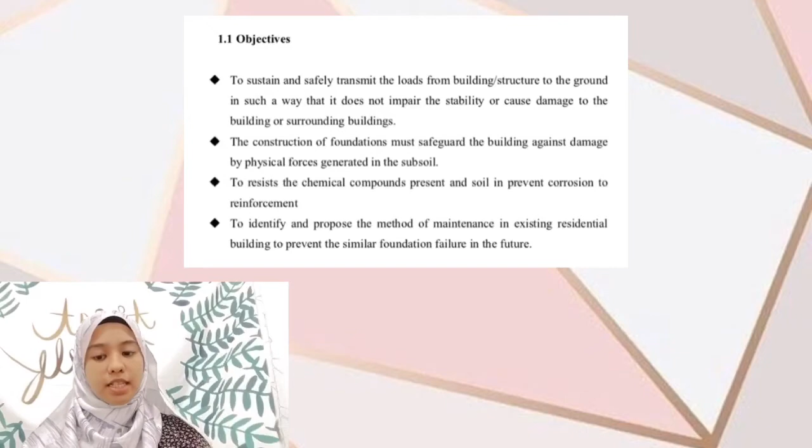88 unit houses Taman Tunas Muda on lot 6034 Mukim 12, daerah Barat Daya, Penang is an observation site for conducting basic failure case studies. From the study, the type of failure, cause, and defect will be determined through the analysis and evaluation. The scope of the study consists of the proposed method of maintenance of the appropriate foundation in the residential building to prevent the similar failure.

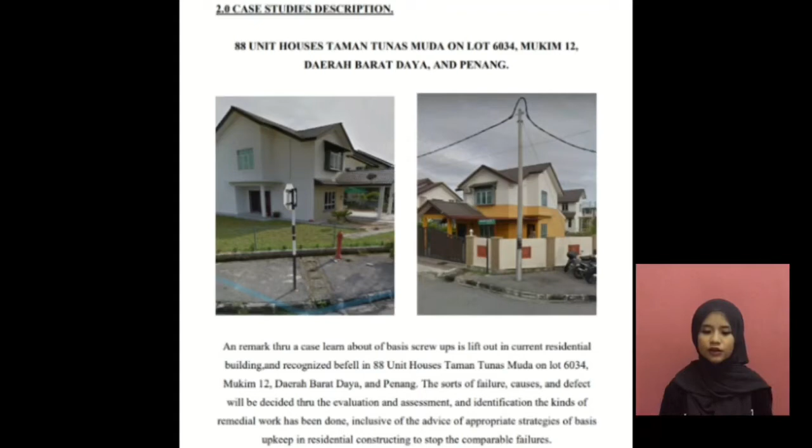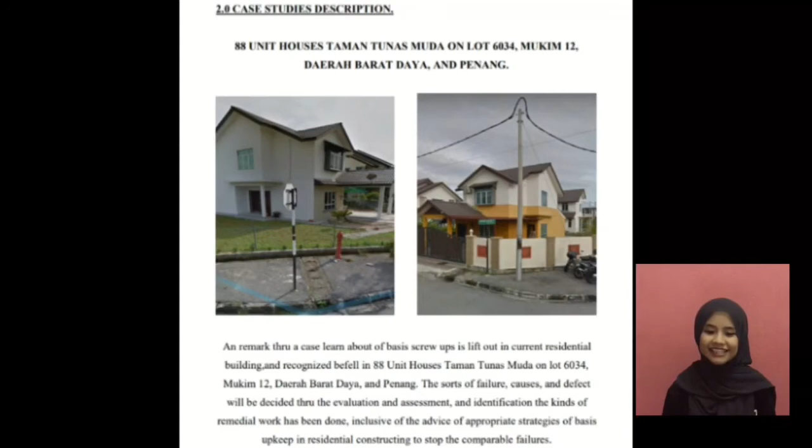Our group chose the location of 88 unit houses Taman Tunas Muda on lot 6034 Mukim 12, daerah Barat Daya, Penang. The sort of failure, cause, and defect will be decided through evaluation, assessment and identification. The kind of remedial work has been done, inclusive of advice of appropriate strategies of foundation upkeep of the residential building to stop comparable failures.

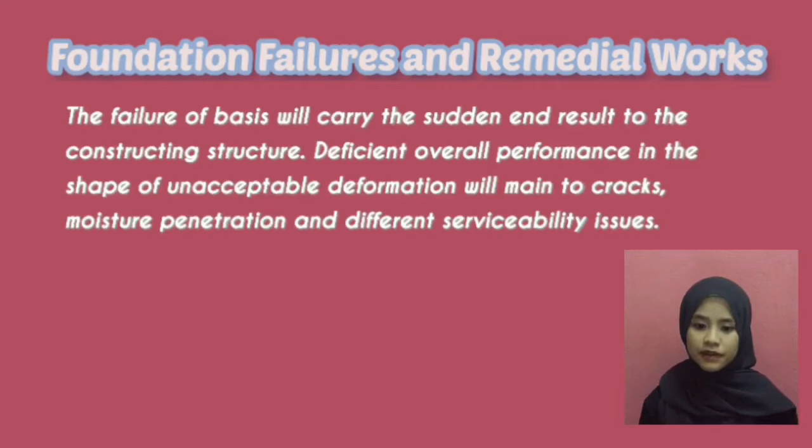Foundation failures and remedial works. The failure of a foundation will carry sudden results to the building structure. Deficient performance in the shape of unacceptable deformation will lead to cracks, moisture penetration, and different serviceability issues. The type of foundation failures.

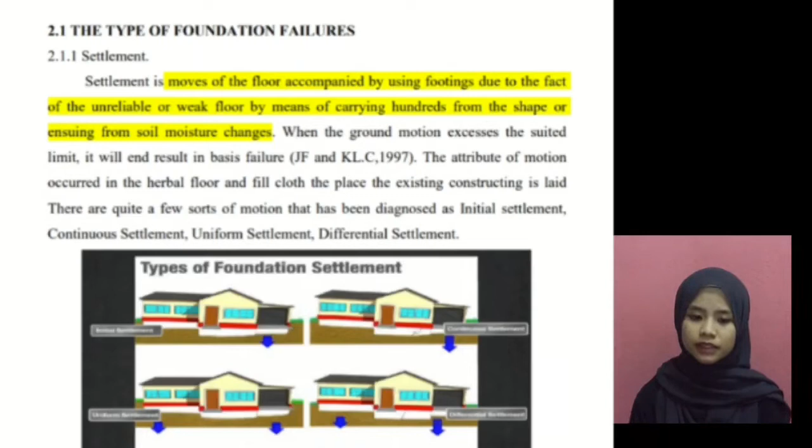Settlement. Settlement is movement of the floor accompanied by footings due to unreliable or weak ground carrying loads from the structure or resulting from soil moisture changes. So these are the types of foundation failures: initial settlement, continuous settlement, uniform settlement, differential settlement.

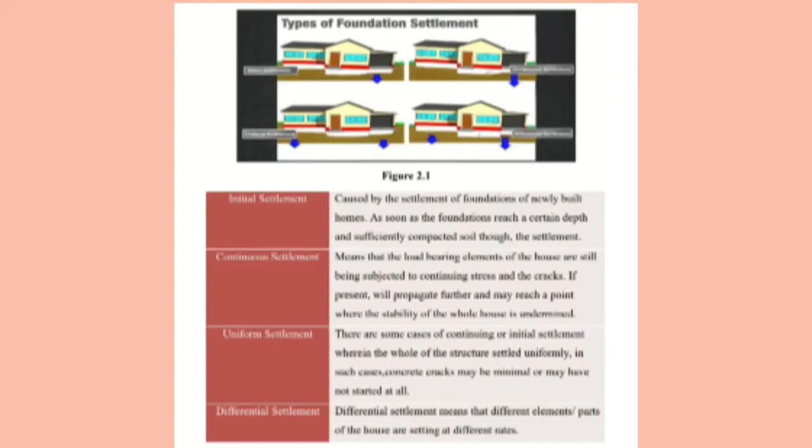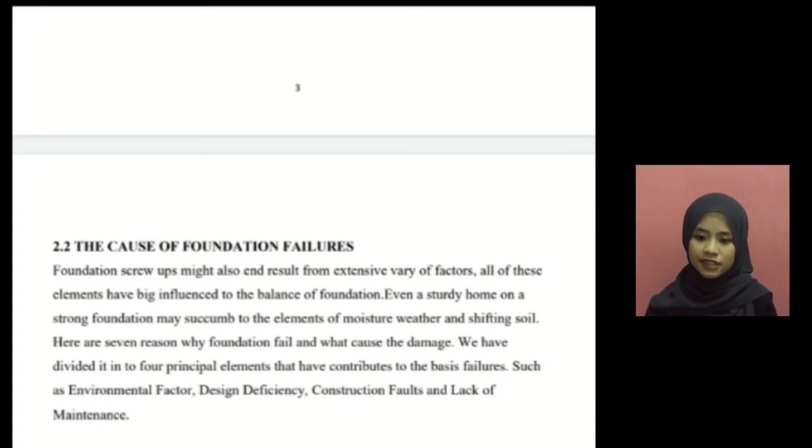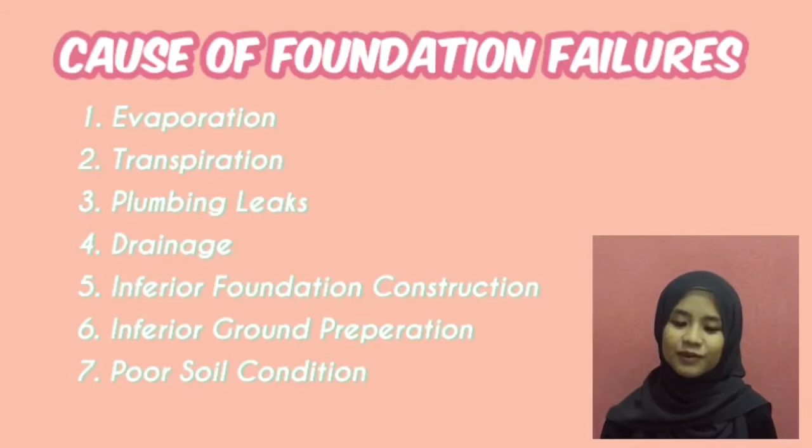So this is the cause of foundation failure. There are 7 reasons why foundations fail and cause damage. There are 4 principal elements: environmental factors, design deficiency, construction fault, and lack of maintenance. But these are the 7 causes: evaporation, transpiration, plumbing leaks, drainage, inferior foundation construction, inferior ground preparation, poor soil condition.

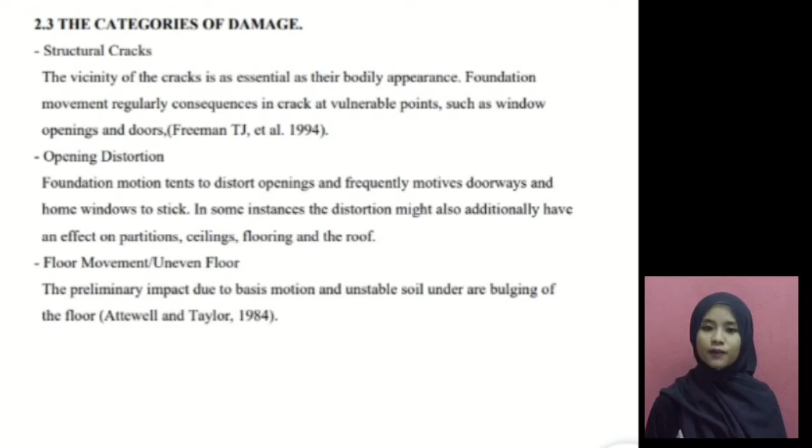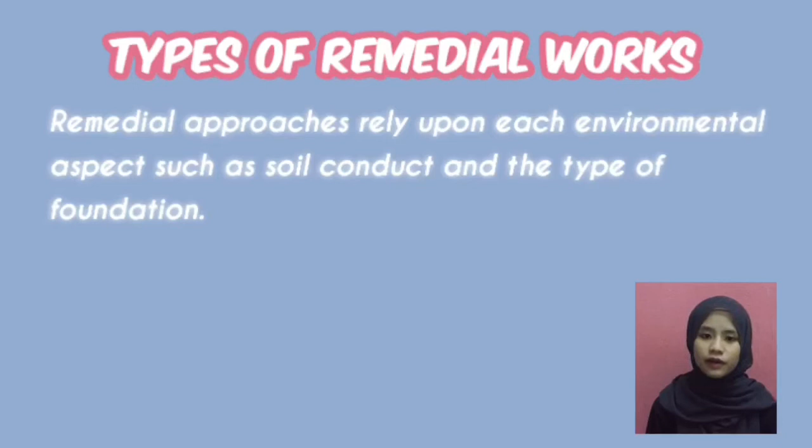The categories of damage. There are 3: structural cracks, opening distortion, floor movement or uneven floor. Types of remedial works. Remedial approaches rely upon environmental aspects such as soil conduct and the types of foundation. So there are 4 types of remedial works: site investigation, testing and monitoring, shoring, and underpinning.

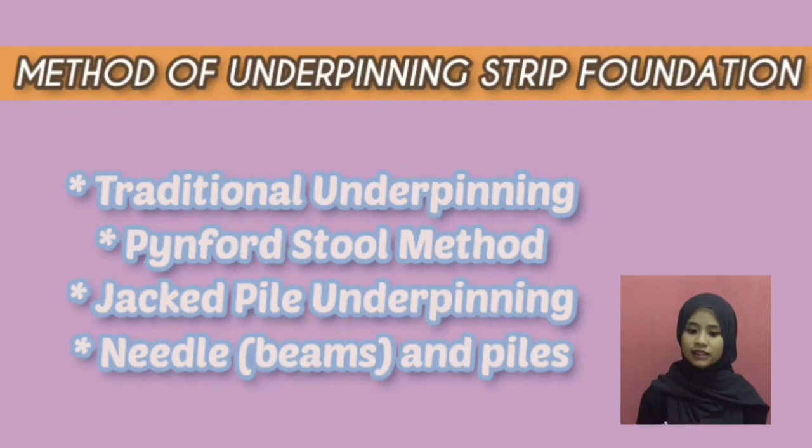Method of underpinning strip foundation. There are 4: traditional underpinning, Pynford stool method, jacked pile underpinning, and needle and piles. So this is the method of underpinning pad foundations or column base. First, temporary support to column and needle piles.

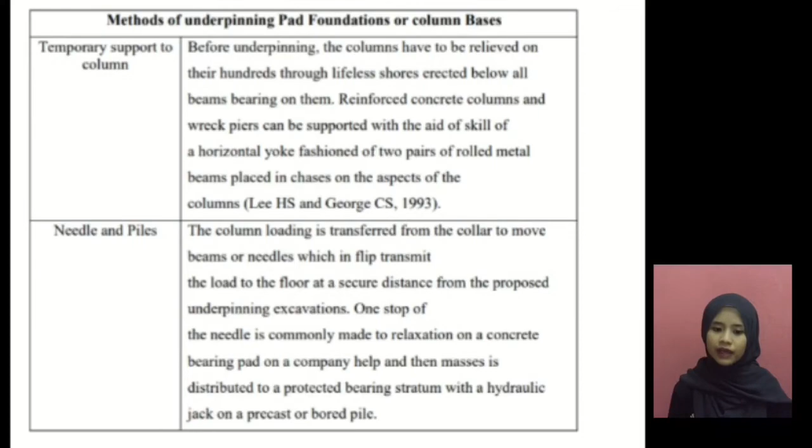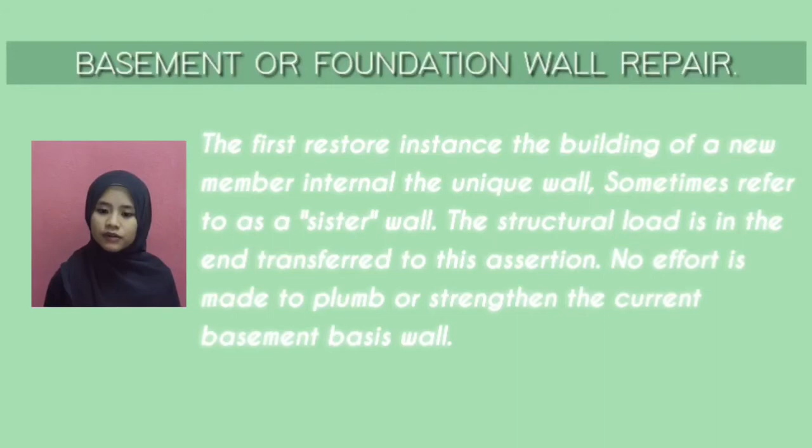Basement or foundation wall repair. The first repair instance includes the building of a new member inside the wall, sometimes referred to as a sister wall. The structural load is then transferred to this section. No effort is made to plumb or strengthen the current basement foundation wall.

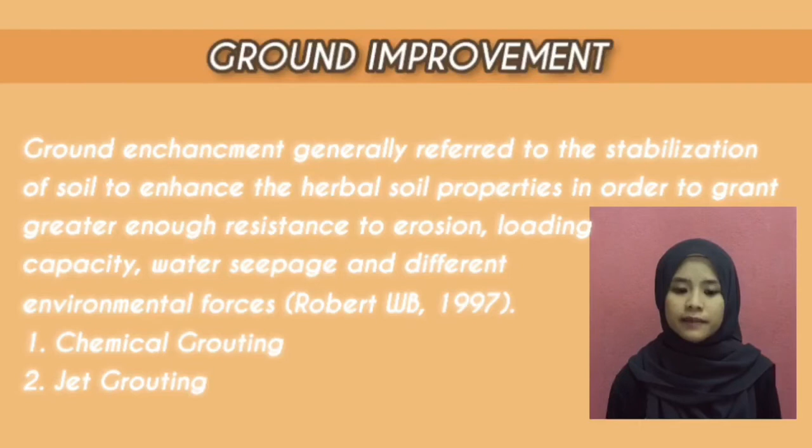Ground improvement. Ground improvement generally refers to the stabilization of soil to enhance the soil properties in order to grant enough resistance to erosion, loading capacity, water seepage, and different environmental forces. There are 2: chemical grouting and jet grouting. Okay.

Summary of analysis and design method.

Groundwater level will increase during the rainy season, and usually it will expand if felt in high moisture content. Groundwater level will also decrease during the dry season, and this decrease is very useful for monitoring and recording groundwater levels. As such, soil is very prone to shrinking in dry conditions.

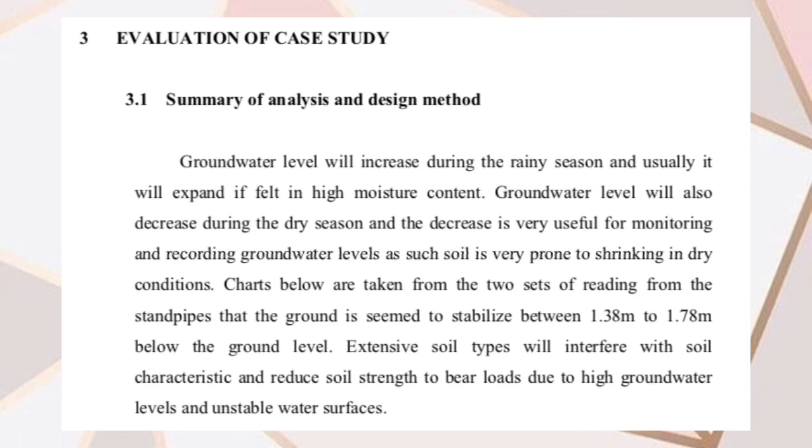Charts below are taken from 2 sets of readings from the standpipes, showing the ground seemed to stabilize between 1.38 meter to 1.78 meter below ground level. Extensive soil types will interfere with soil characteristics and reduce soil strength to bear loads due to high groundwater levels and unstable water surface. Comparisons between case study results analysis.

Article 1. Area House number 40 and 42, Lintang Bayan, using Demec gauge and plastic telltale for measurement. Consultant Ihsan Sendirian Berhad observed and studied the actual problem to find the result based on study and assumption, dividing the remedial work into 3 parts and carrying out site monitoring during the remedial work.

Scope of remedial work: underpinning works and pressure grouting works. Obtained from this boring test were 8 undisturbed samples and 62 disturbed samples to test in the laboratory.

84.8 kN per meter square and 48.2 kN per meter square at the depth of 1.5 meter and 2.4 meter respectively. In borehole 2, the undrained cohesion obtained from the UCC test are 52.4 kN per meter square and 44.7 kN per meter square at a depth of 1.2 meter and 2.1 meter respectively.

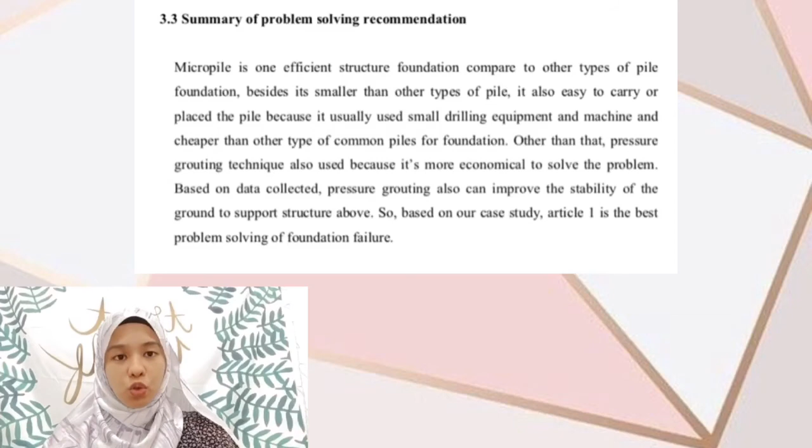Number 4 is implication. Firstly, the message developed from this case study is that foundation failure may cause unexpected results to building structures. Therefore, there are types of foundation failure such as settlement. Settlement is the movement of the ground followed by footing because of unreliable or weak ground carrying loads from the structures, or resulting from soil moisture changes.

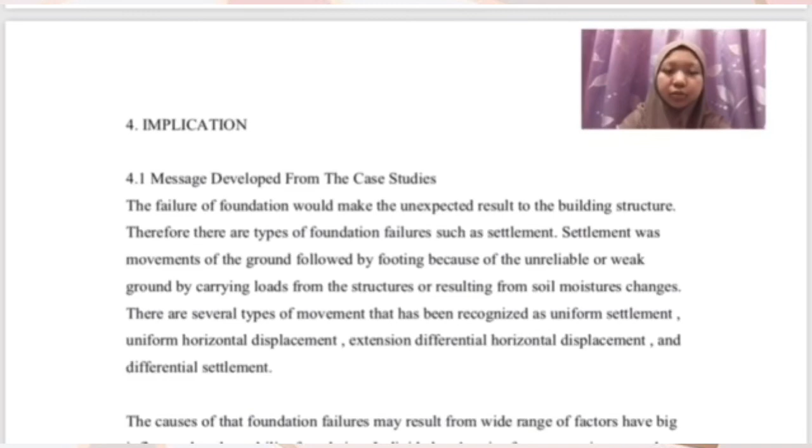The causes of this foundation failure are divided into 4 factors. Firstly, environmental factors. Secondly, design deficiency. Thirdly, construction fault, and lastly, lack of maintenance.

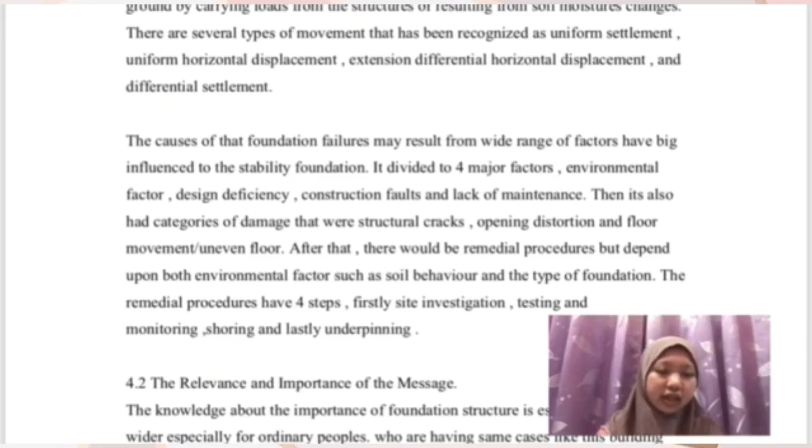After we know about the types and causes of foundation failure, we move to the remedial procedure. The remedial procedure has 4 steps: firstly, site investigation; after that, testing and monitoring; then shoring; and lastly, underpinning.

Number 2 is the importance of this message. Why must we know the causes of foundation failure? This is important because we can prevent bad things from happening to our family, and we also know if our home is safe to live in or not.

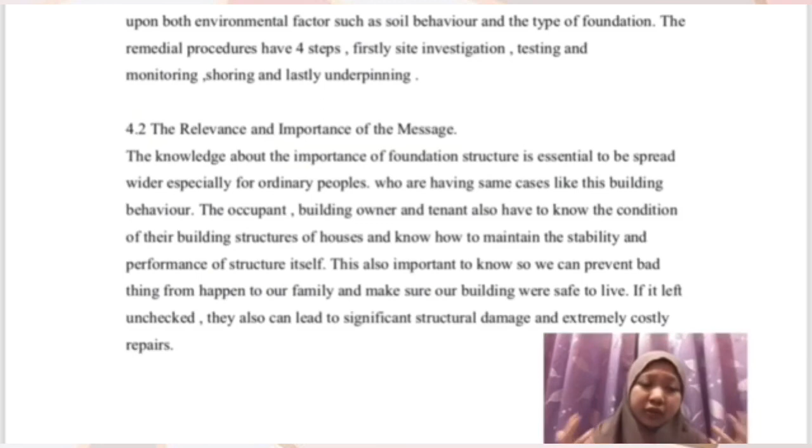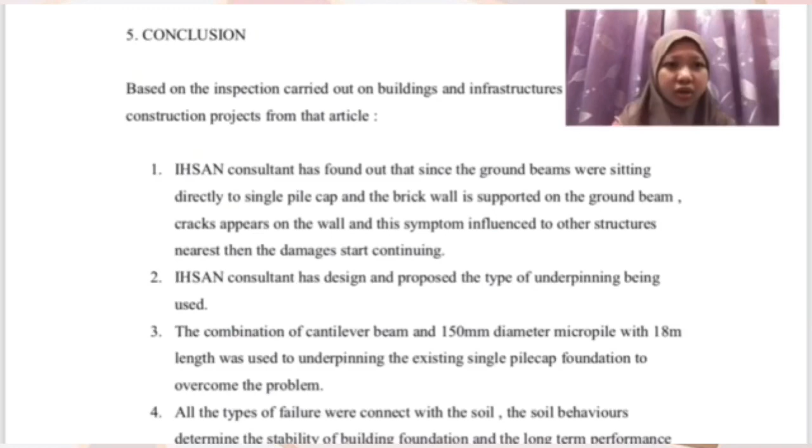The conclusion we get from this case study is that foundation failure may cause a big impact on the performance of building structures. Regular site inspection is important to know whether there is damage to the building structures. The inspection will maintain the building structure, because if they find or notice a small crack in the building, action will be taken.